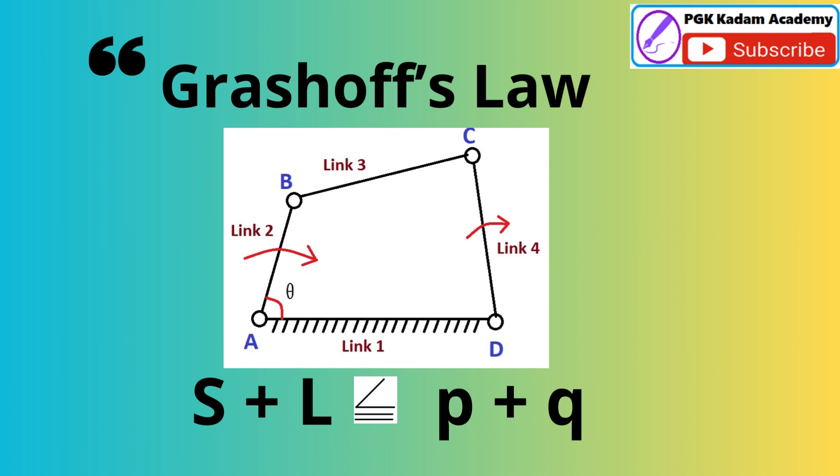This video is on Grashof's law. By understanding this law, engineers can design and analyze various mechanical systems, from simple mechanisms to complex machines, ensuring they operate as intended. Grashof's law plays a pivotal role in guiding the design and optimization of countless mechanical systems across diverse industries.

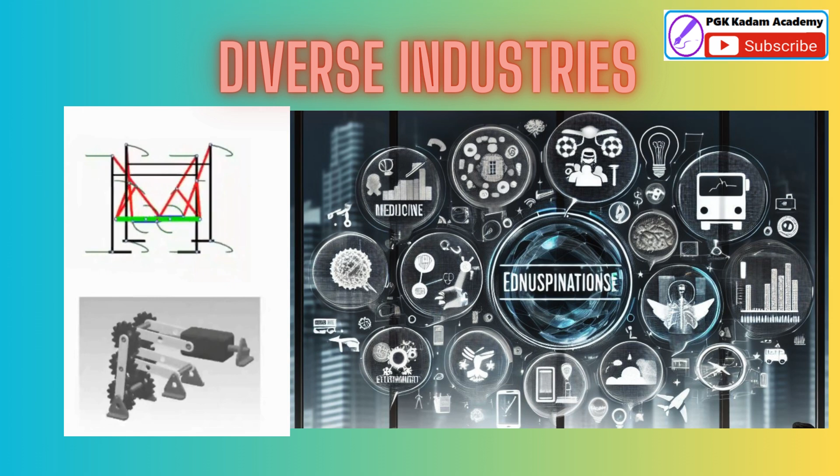What is a planar four-bar linkage? The four-link mechanism is the simplest of all closed-loop mechanisms. A four-bar linkage comprises four bar-shaped links that have three moving links, one fixed link, and four pin joints, or four turning pairs.

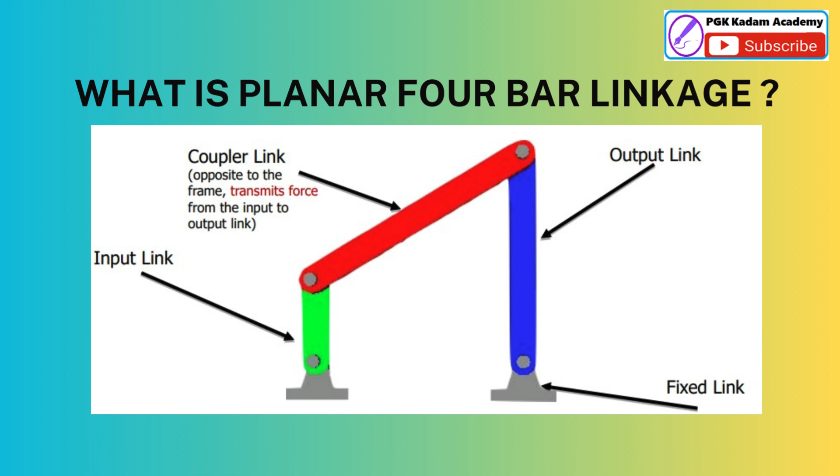S is the crank. A link which can make complete revolution is known as crank. P is the lever or rocker. Any link which does not revolve is called a rocker; it only oscillates, making a partial rotation. This is known as lever, rocker, or follower.

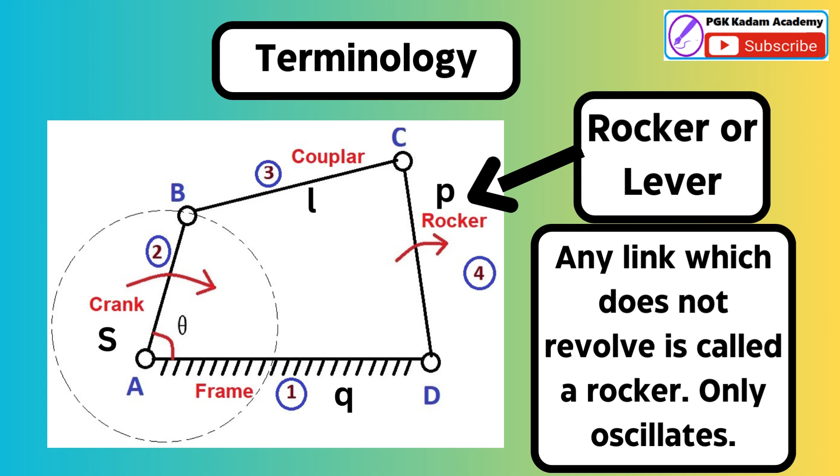Q is the frame. The fixed link is known as the frame of the mechanism. L is the coupler. The opposite link of the frame is known as the connecting rod.

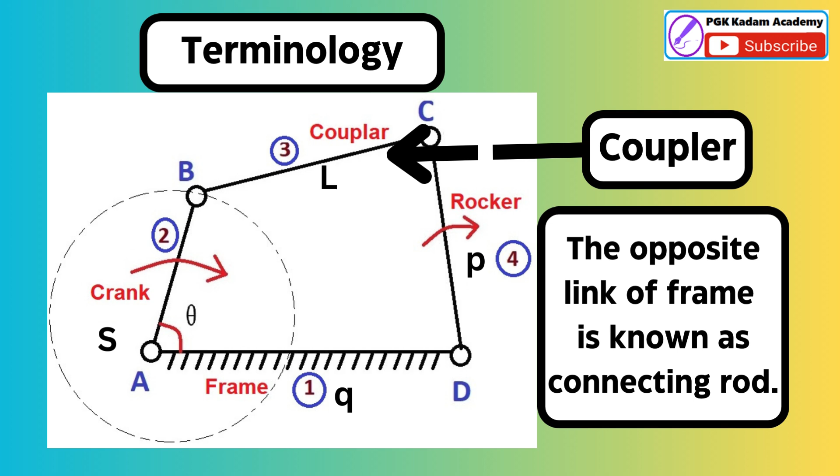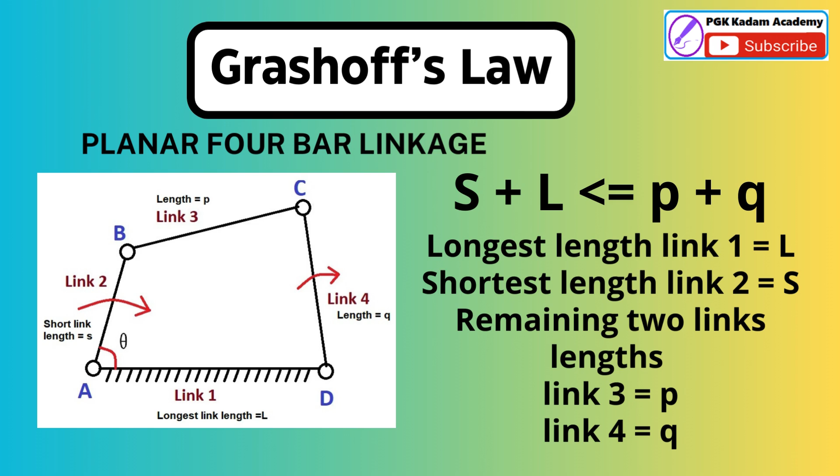What is Grashof's law? For a planar four-bar linkage or mechanism, a link can make a complete revolution relative to another link if the sum of the shortest and longest bar lengths is less than or equal to the sum of the remaining bar lengths.

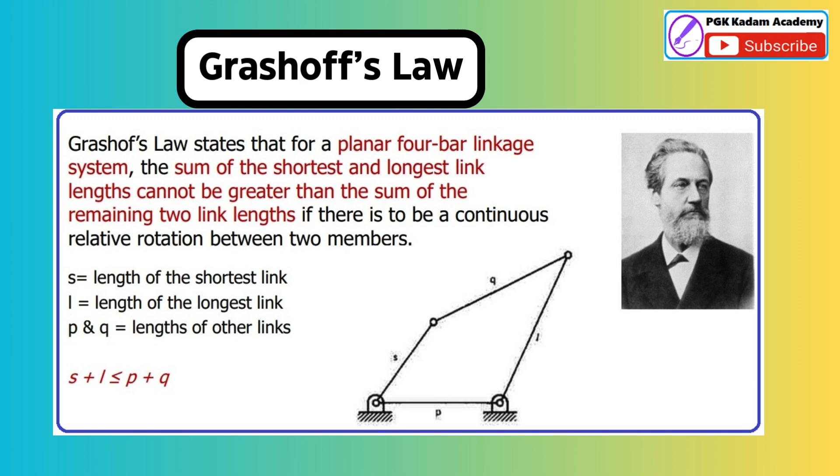The sum of the shortest and longest link lengths should not be greater than the sum of the remaining two link lengths if there is to be continuous relative motion between the two links. Mathematically represented as S plus L less than or equal to P plus Q.

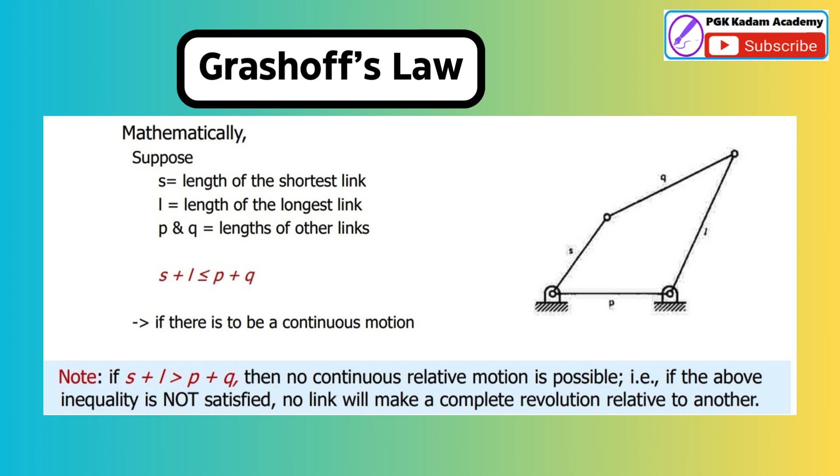A kinematic chain is a combination of four or more kinematic pairs, such that the relative motion between the links or elements is completely constrained. The simplest and basic kinematic chain is a four-bar chain or quadric cycle chain, as shown in the figure. It consists of four links.

Each of them forms a turning pair at A, B, C, and D. The four links may be of different lengths.

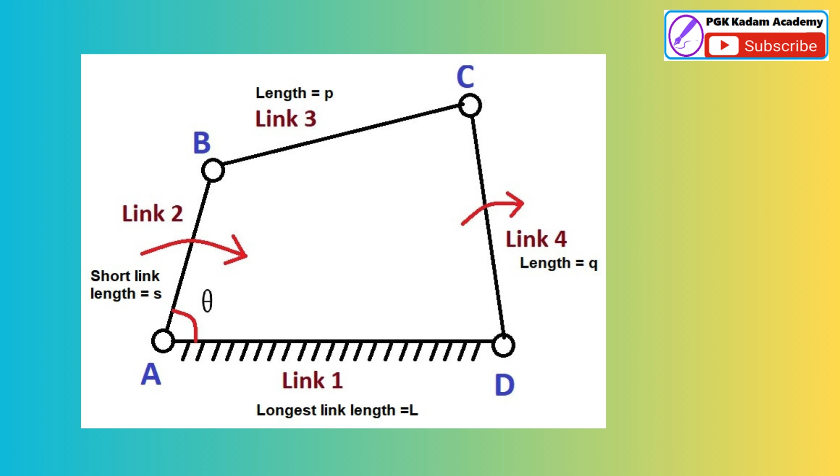A very important consideration in designing a mechanism is to ensure that the input crank makes a complete revolution relative to the other links. The mechanism in which no link makes a complete revolution will not be useful.

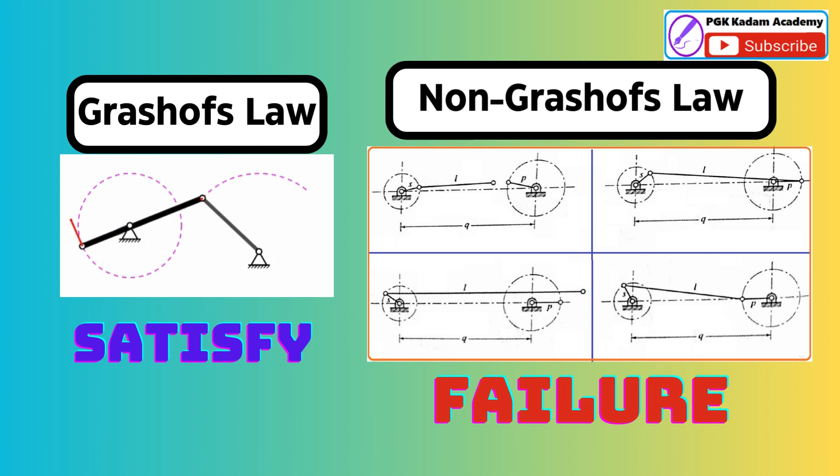In a four-bar chain, one of the links, in particular the shortest link, will make a complete revolution relative to the other three links if it satisfies Grashof's law. If this condition is not met, the mechanism will not function properly and may result in failure or instability.

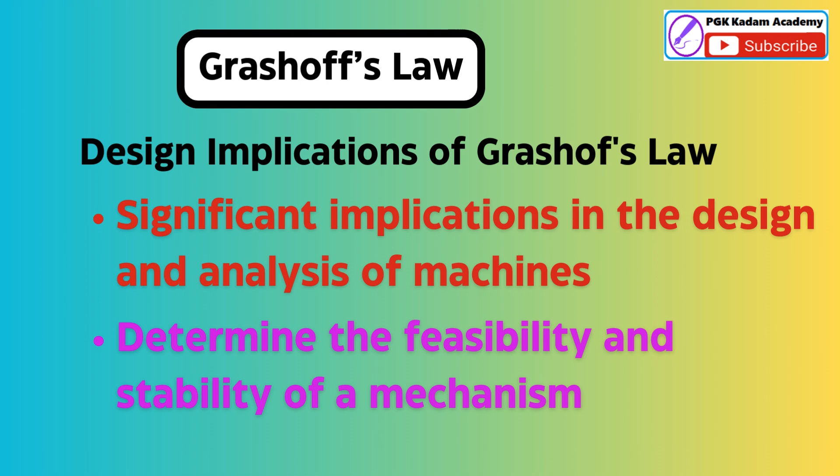Design implications of Grashof's law. This law has several practical applications in the design of machines, as it helps engineers determine the feasibility and stability of a mechanism.

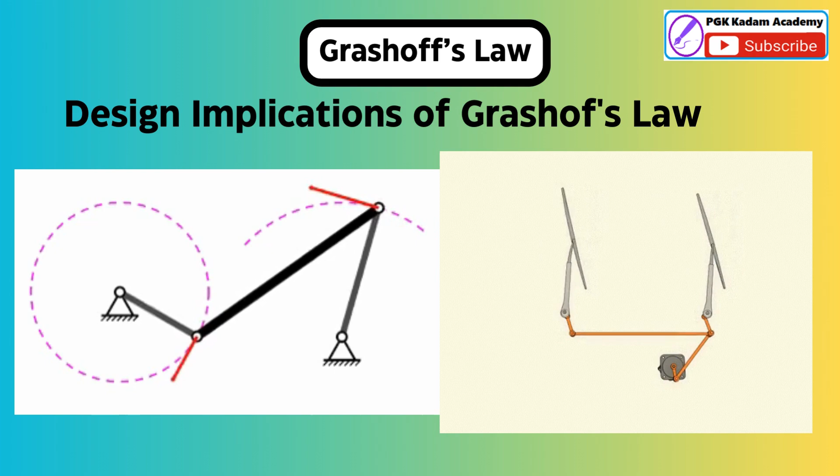For example, it helps engineers determine the optimal placement of links in a mechanism to achieve the desired motion. It is particularly useful in the design of crank-rocker mechanisms, commonly used in engines, automobiles, and machines. It also aids in identifying potential design flaws and can assist in troubleshooting problems in a mechanism.

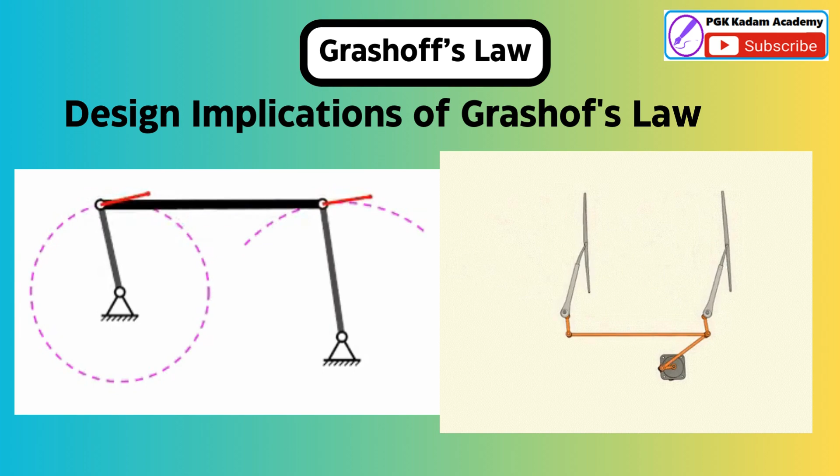When designing or analyzing a slider-crank mechanism, carefully evaluating the Grashoff condition is crucial. It dictates the feasible range of connecting rod lengths that will permit full rotational motion without clashes. Respecting Grashof's law ensures smooth, reliable functioning of the mechanism over extended operating cycles.

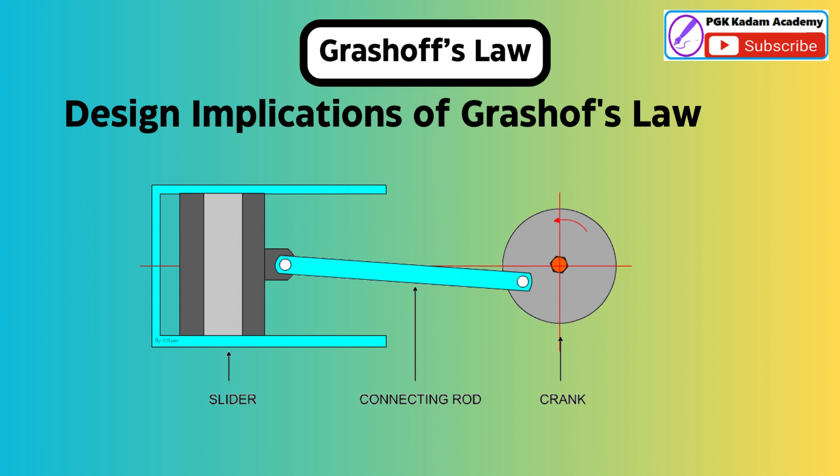This is because the shortest and longest links will intersect, preventing the mechanism from completing its intended motion. When the above inequality is not met, the chain is classified as a non-Grashoff chain. In such a chain, none of the links can complete a full revolution relative to the other links.

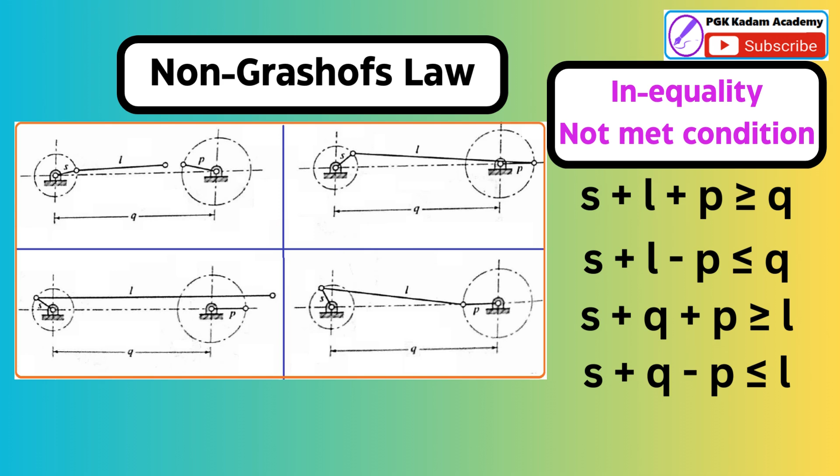Four conditions are shown in the figure if the Grashof's law condition is not met. Let us learn some inversions of the Grashof chain law. We know that the process of fixing different links in a kinematic chain to obtain different mechanisms is known as inversion.

In this case, if Grashof's law inequality is not satisfied, no link will make a complete revolution relative to another.

Attention is called to the fact that nothing in Grashof's law specifies the order in which the links are connected, or which link of the four-bar chain is fixed. We are free, therefore, to fix any of the four links.

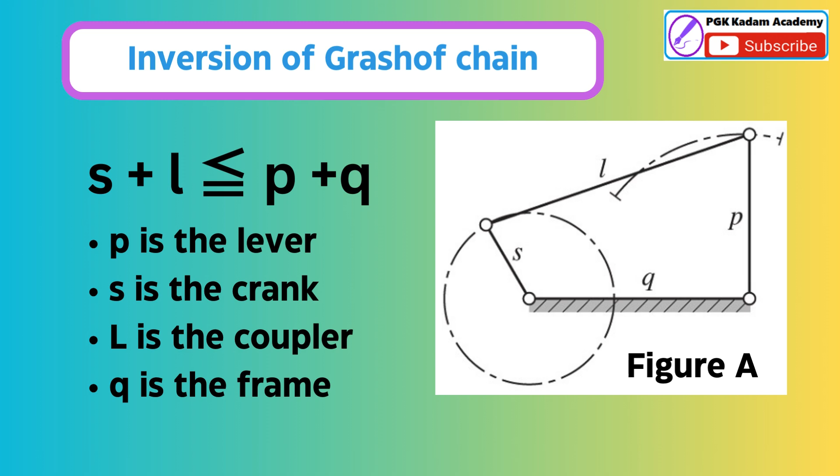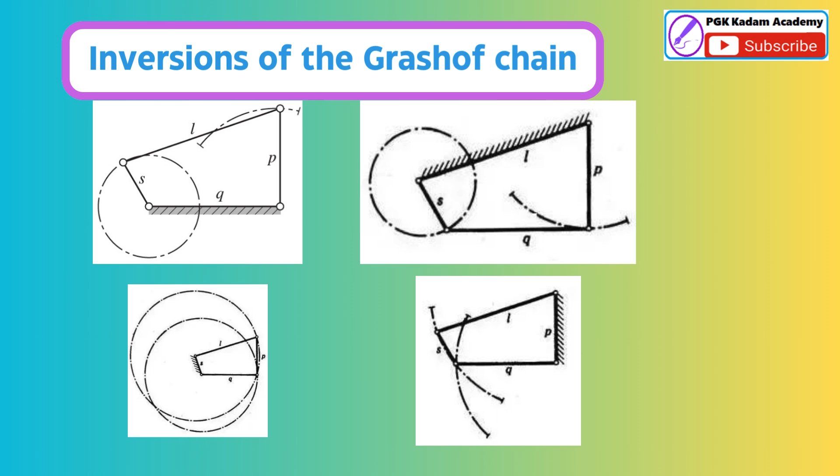When we do so, we create the four inversions of the four-bar linkage. All four inversions fit Grashof's law, and in each, link S makes a complete revolution relative to the other links. The different inversions are distinguished by the location of link S relative to the fixed link.

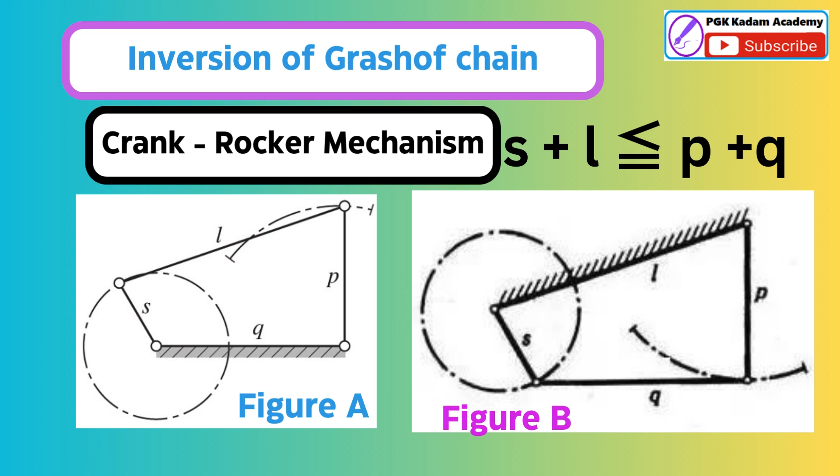If the shortest link is adjacent to the fixed link, as shown in Figure A and Figure B, we obtain what is called a crank-rocker linkage. Link S is, of course, the crank because it is able to rotate continuously, and link P, which can only oscillate between limits, is the rocker.

The next inversion, the drag-link mechanism shown in the figure, also called the double-crank linkage, is obtained by fixing the shortest link S as the frame.

In this inversion, shown in the figure, both links adjacent to S can rotate continuously, and both are properly described as cranks. The shorter of these two links is generally used as the input link or driver.

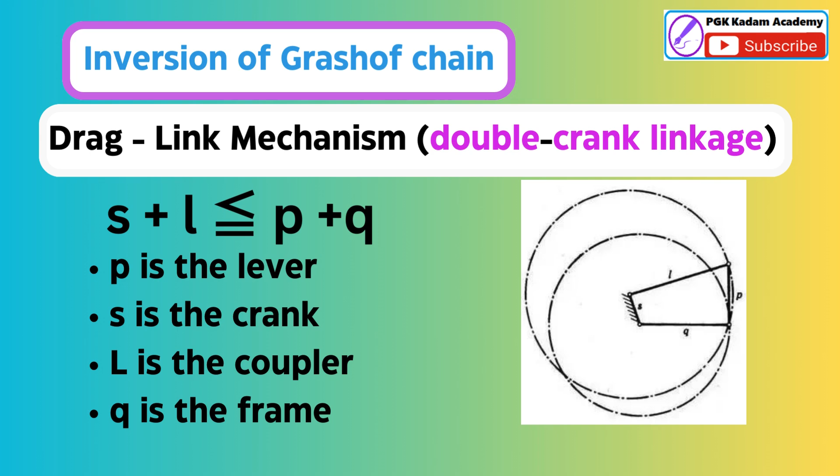Although this is a very common mechanism, you will find it an interesting challenge to devise a practical working model that can operate through the full cycle.

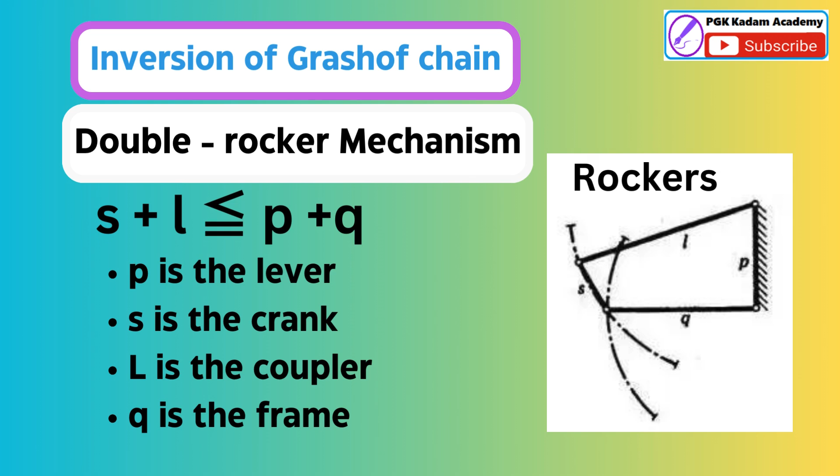By fixing the link opposite to S, we obtain the fourth inversion, the double-rocker mechanism, shown in the figure. Note that although link S is able to make a complete revolution, neither link adjacent to the frame can do so. Both must oscillate between limits and are therefore rockers.